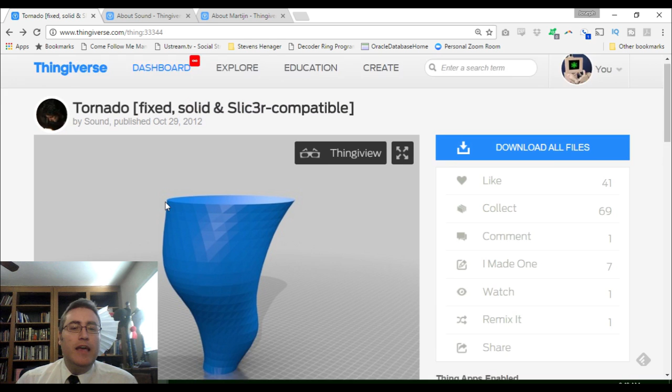So the first thing that you need to do with any slicer is load up a model, and the model that we are going to be using again is the Tornado model here that was originally created by Martijn Elserman and has been modified by Alessandro Ranellucci, and he modified it with a top and a bottom, so let's take a look at that model.

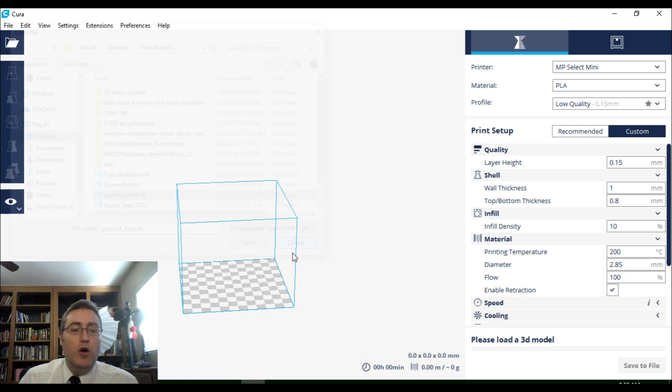So to load a model, you either click the open file here, or click file, open file. I've got all of my models organized in the print projects folder here, and then you just double click on the model and click open. Or my personal way of doing it is to go to where the model is located on my directory structure and just click and drag the STL I want to print in here.

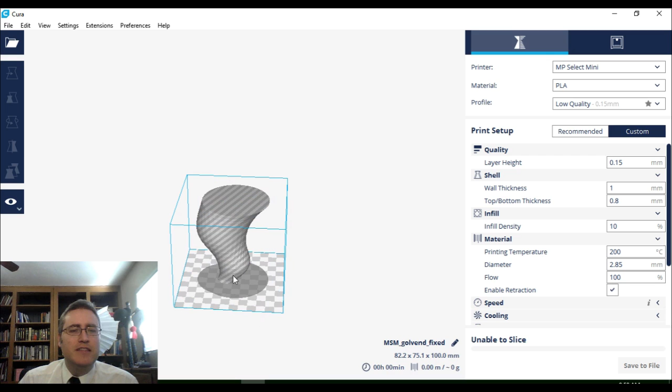Now notice that Cura immediately says, whoa, first of all, none of the models fit in the build volume. This model at 100% is too big. And so it auto-scaled the model to 48% of the original size. Now there's a little bug in the current version where even after auto-scaling it says, I still can't print it. But if you click on the model and just kind of wiggle it around a little bit, it'll say, oh wait, no, now it fits. And it's good.

You can click and drag and move the model so you don't have to print everything in the middle. Also, we have options over here to scale it. Notice it's automatically scaled it to 48%.

So in Cura 2, the scale factor is from 0 to 100%. So if you want something to be half size, it would be 50%. I want this to be 45%. And there we go, because I like nice even numbers.

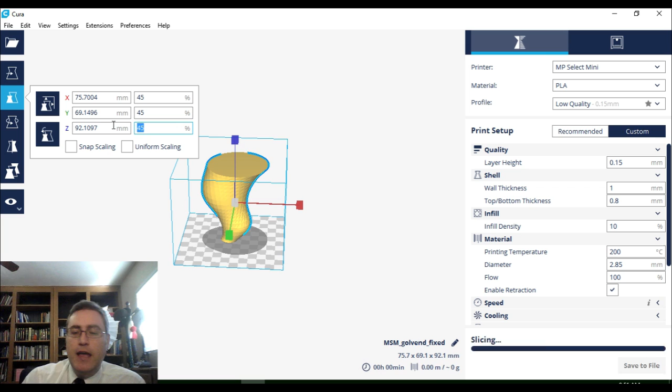And again, you can turn off uniform scaling. And if you do that and you say, now I want it to be 20% of its height, then notice that while it's still wide, it's 20% of its height.

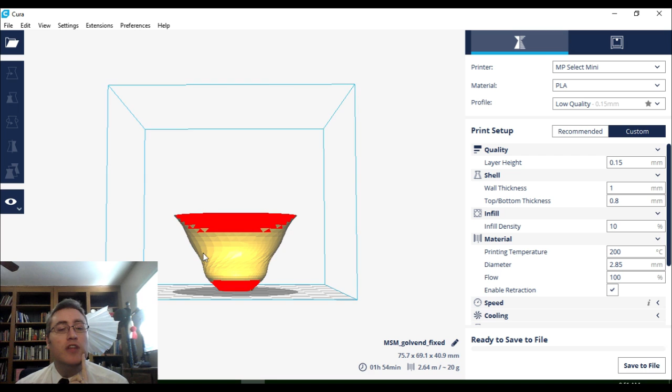But notice that in doing this, it created these red sections. And this is something that Cura does to warn you that these angles might be printing at too high an angle. Because I squashed it down, the angle of those facets changed, and so you might want to turn on support. Now, of course, I'm not going to turn on support. I'll talk about how to do that in a minute, but I'm just going to go back to making this 45% and turn uniform scaling back on.

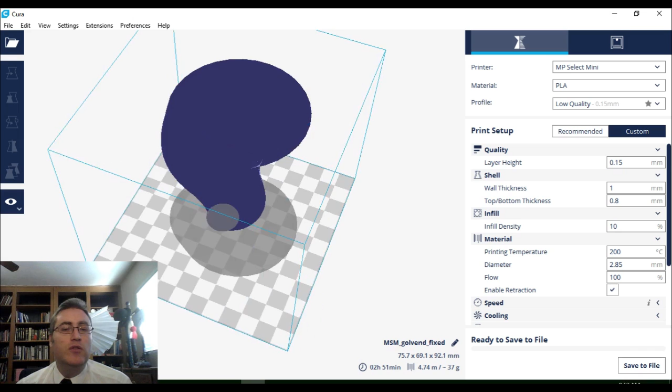Also down here at the bottom we have view mode, so you can view this as a solid print. X-ray mode allows you to see through the model so you can see what's on the other side. And then also there is layers mode, and layers mode gives you kind of a preview of what the print is going to look like when it's done.

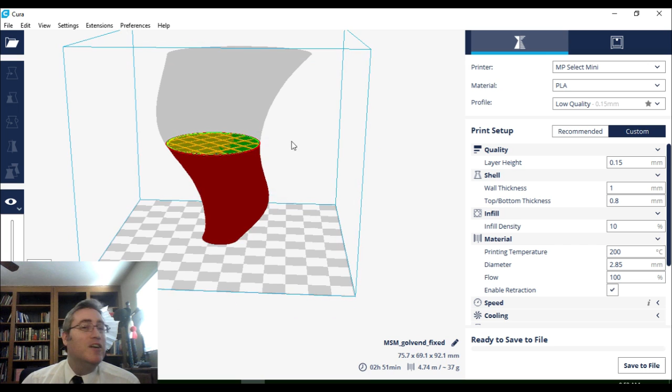And Cura is very fast at bringing this up. So there's the top and sides. As you go on down, you can see the infill for each individual layer, and it gives you a nice shadow for the whole thing. I love Cura's preview, Cura 2's preview. It's absolutely beautiful. And there you can see the 10% infill, and then we can go down and we can see the flat layers on the bottom, and everything is perfect.

It looks good, except that it's nothing like what I want. Because this model I actually want to print hollow with no top, so it can be like a vase. So for that, we're going to have to edit the settings.

Now let's take a look at these settings. Oh, I forgot to mention, the first thing you're going to have to do when you set up Cura is set it up for your printer. If it doesn't have a printer set up, the first thing it does when it opens up is it asks, hey, what printer do you want me to print on? Fortunately, my MP Select Mini was already on there, and I could tell it the size and everything, so that was all set up.

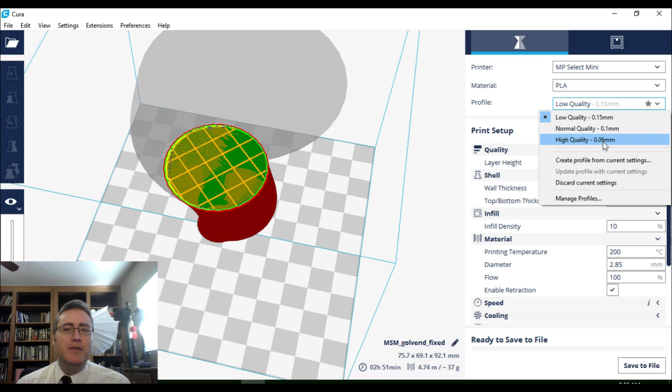And what material do I want to print? Now here's another thing about Cura that I think is interesting. They've made low quality 0.15 millimeter, which for me has always been like the minimum acceptable quality. 0.2 millimeter can be done and it prints faster, but 0.15 millimeter layers are just at that crux between looking good and printing not too slowly. So it's interesting to me that that's low quality. Normal quality is 0.1 millimeter, and high quality pushes it to less than 100 micron layer height, which is super cool. I'm going to keep it at low quality.

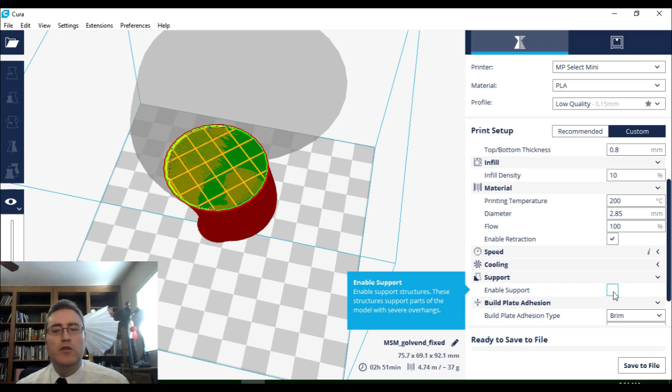I'm okay with that. But down below, these are your normal settings, and below those are your advanced settings. Down here is where we can turn on our support. We can enable support right here. Again, this model doesn't need it, so if you turn on supports, you're not going to see any difference. It's still going to reslice the model and try to see where it needs supports, but it's not going to find anywhere. Everything on this will print without supports, I think.

Yes, no supports necessary for this model. So might as well turn that back off.

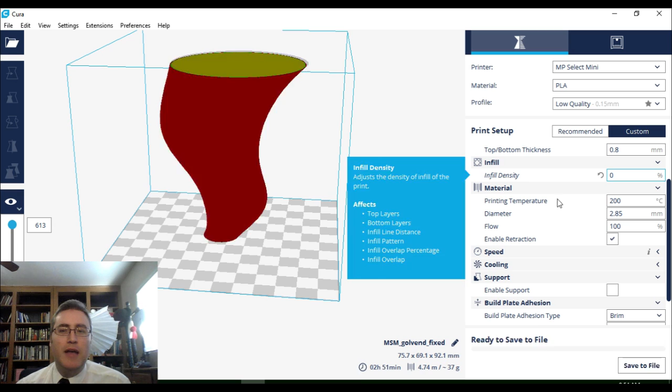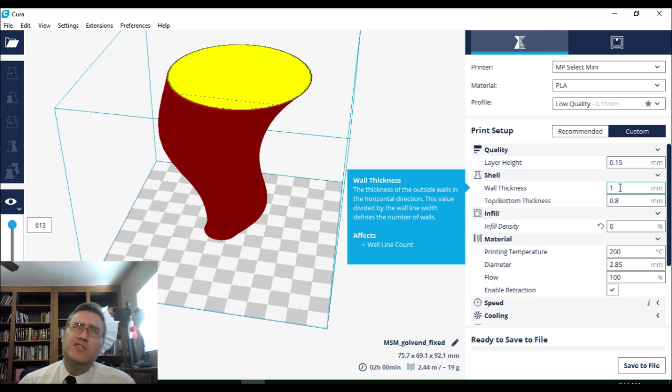So I said that I want to have a hollow top and no infill on the inside. Well, no infill on the inside is easy enough, I'll just switch that to 0%. But how do I get rid of the top thickness? Now notice again in Cura 2, everything is done in absolute dimension. So if I want 0.8 millimeter on my bottom thickness, that's going to translate to about 5 layers. But I want a nice thick bottom layer, but no top layer. And in fact, I want more of a 1 millimeter wall, which is interesting because I've got a 0.4 millimeter nozzle.

If I scroll down into here and scroll in, yeah, it looks like it's doing about 3 shells. So yeah, that's all right. I might want to thicken that up, maybe to 1.5 millimeter wall thickness.

And I can change the bottom to be a nice 2 millimeter thick bottom or a 1.5 millimeter thick bottom. But where do I change the top layer? Well, this is something clever in Cura 2.0.

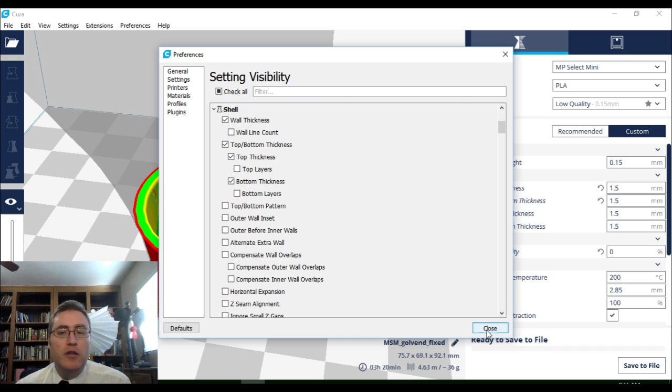If you hover over each of these headings, you see this little gear icon, and if you click on this, a new menu comes up that allows you to turn on what settings you can see. So you can automatically just turn off everything if you don't want to see it, or turn on everything if you want absolute control. Well, I want to control the top layer, and I'll leave the bottom layer on there too. Now I can independently control these.

So my top thickness is 0. And it's giving me a little information. It's normally calculated but has no settings, so I can restore it. And I love that you can just click the little restore button and it puts everything back.

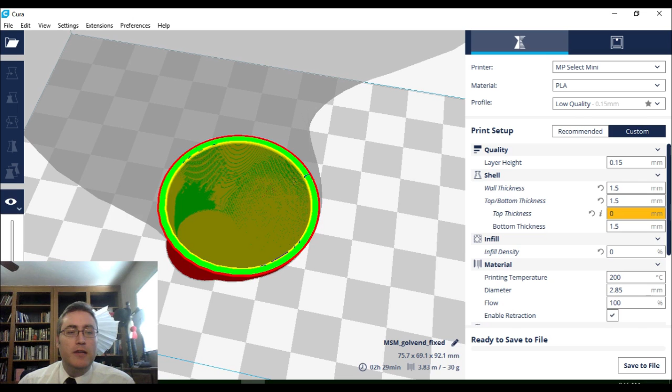And my bottom layer is 1.5 millimeter. So as we go up and down the layers, we'll see that it prints a couple of bottom layers and then comes up to the top, and the top is hollow.

So now I've got this set up all the way that I want it to. I can turn on skirts and rafts and all those things that I want. My brim I've got set at 0. I can turn on, but you know, all those settings you can play with. We talked about those individual settings.

I've got this the way that I want, so it's now time to take this G-code file, save it, and then take that G-code file and give it to my printer. So I can do that. It's actually down here. There's a click Save to File button.

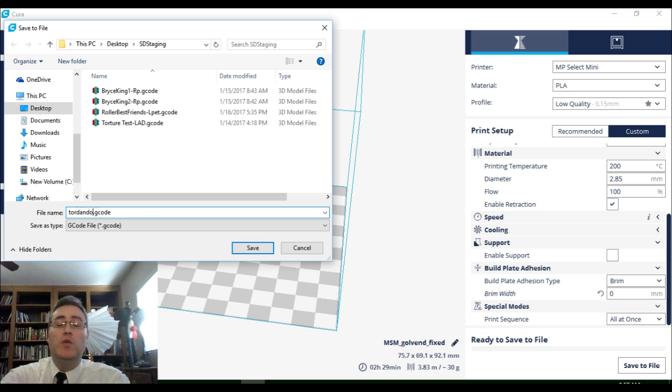Click that button right now, and then it automatically appends a little MSM to tell me a little information about the way that it was sliced. However, I don't know what MSM means, so I'm going to delete this because it's not really descriptive, I think, of what this is. This is our tornado.

I hit dash and I put in here that it's sliced for my MP Mini for PLA in vase mode. This is just a little code that I've come up with because I slice for multiple printers and multiple materials and things like that. I've come up with a little code so that I know how I sliced it.

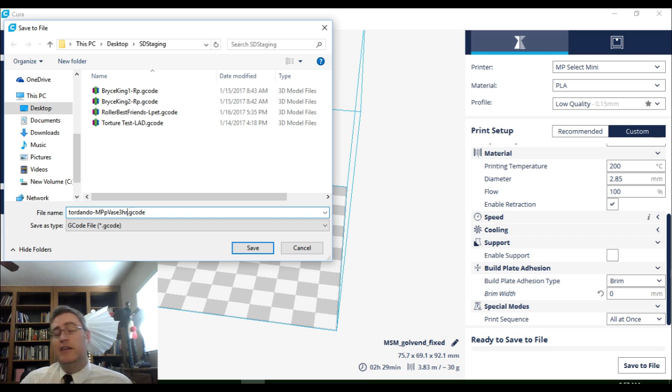And sometimes I'll even put on here 2.5 hour, 3 hour print so that I can have an idea of how long it will take to print. I forgot to say that on my last video. Yeah, that's all right. You don't have to do any of that. This is just a code that I do. I can recommend that to you if you like.

But there we go. We hit save, and then you just have to take that G-code file and get it to your printer. Now, I'm not going to save this one because I have to do this again for another slicer after this. But there you go.

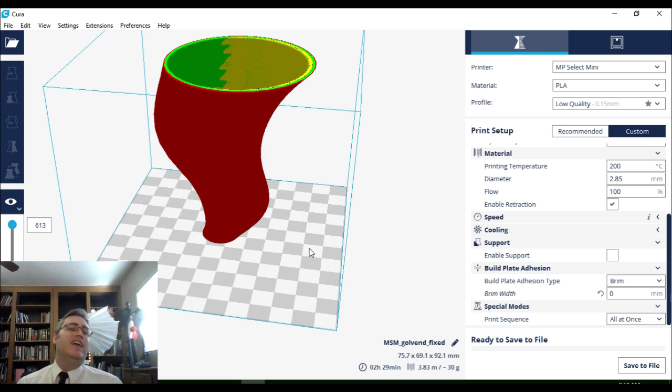There's everything you need to know about how to use some advanced settings to do some cool things. And I mean, check it out. We made the shape of this model was not defined by its STL file. It was defined by the way that we manipulated the slicer to do it. And that's super cool. So I hope that this has helped you.